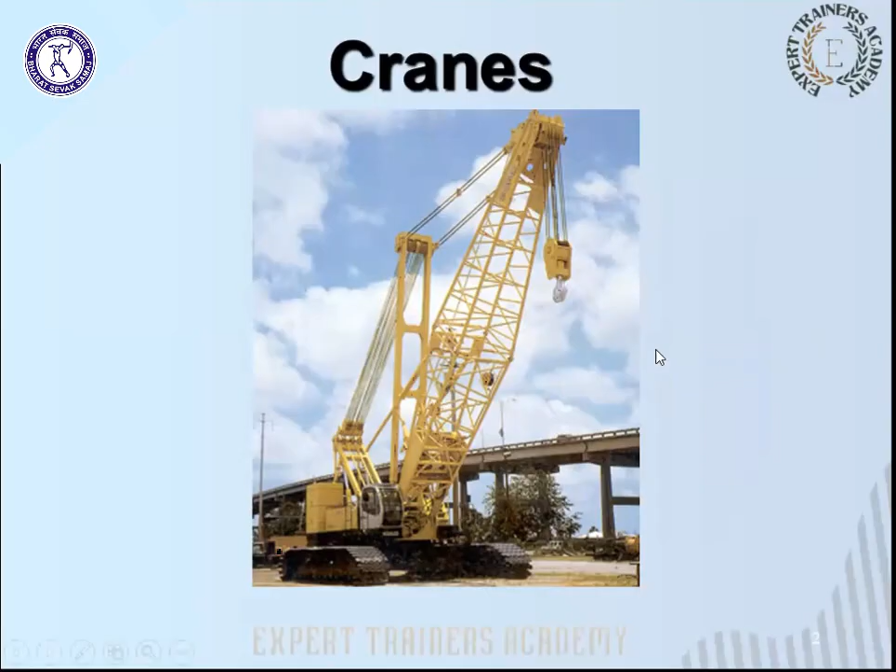To develop a safer working environment. Crane, it has come from a bird. It's a large, long-legged and long-necked bird. That's helped us to build this equipment to lift objects within a certain radius. So this topic is about crane.

What are the causes or hazards involved in crane operation? It might get in touch with overhead power line cables. It might topple over, in other words overturn, due to exceeding the safe working load, or SWL as they call it, and fall of material and mechanical failures.

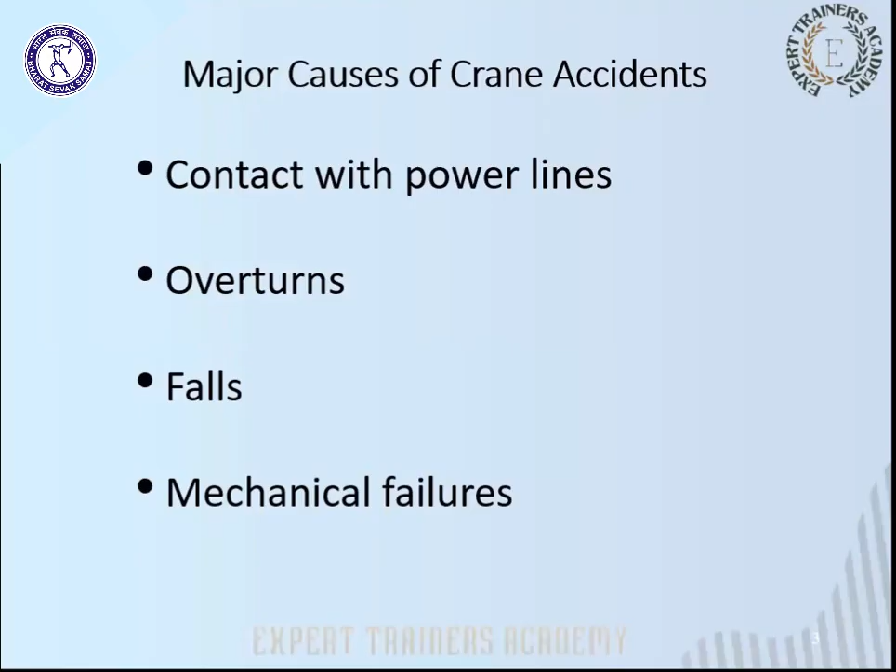So how do accidents occur? Instability of the crane. How does the instability come from? Perhaps the load is not secured, the load capacity has been exceeded, or the ground level is not even or too soft. There might be lack of communication between the operator and the signal man or the banksman, lack of training, and inadequate maintenance or inspection of the crane. So these are the reasons crane accidents could occur.

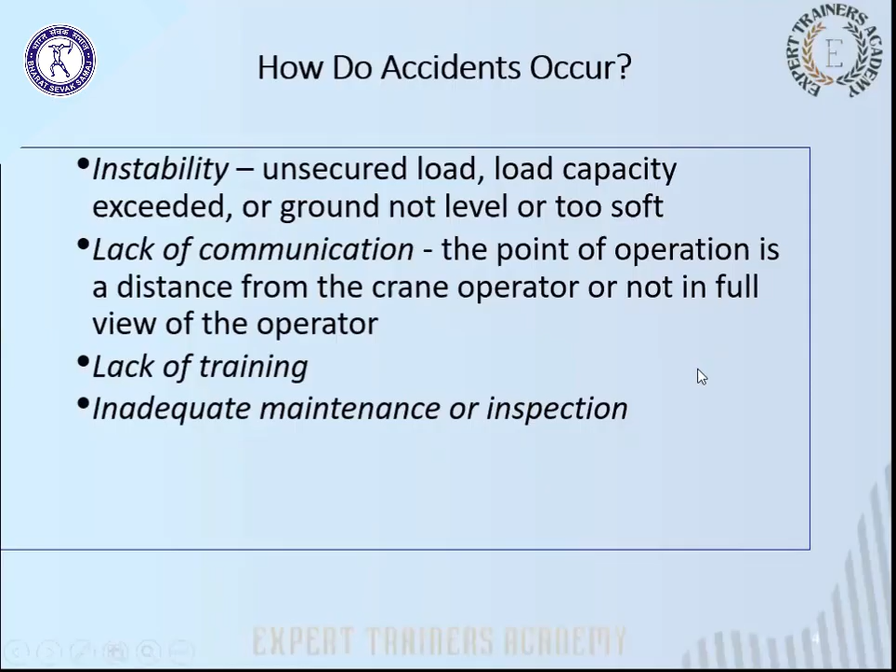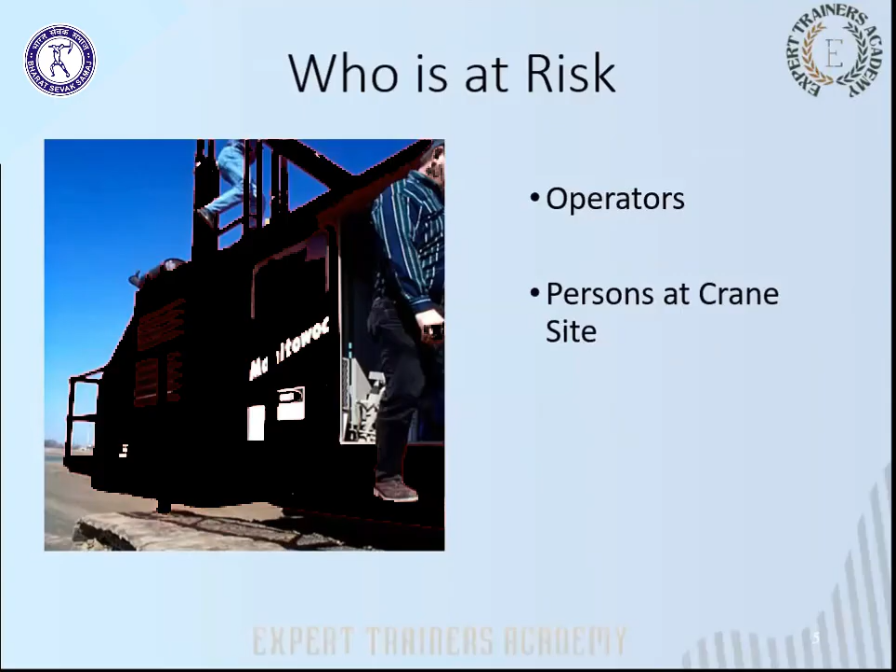Moving on to the next slide. Who are at risk? The crane operator is at risk, or the person at the crane site. Whoever is within the radius of the crane site might be at risk of the crane accident.

Definitions: Crane, it consists of a rotating structure for lifting and lowering horizontally on rubber tires or crawler treads. Hoist, used to lift and lower the load. Boom, an inclined spar or strut or other long member supporting the hoisting tackle. Boom stops, a device used to limit the angle of the boom at its highest position.

Brake, to slow or stop the motion by friction or power. The block, sheaves or grooved pulleys in a frame with hook, eye, and strap. Jib, the extension attached to the boom point to provide added boom length for lifting specified loads. These are the different components of the crane we talked about.

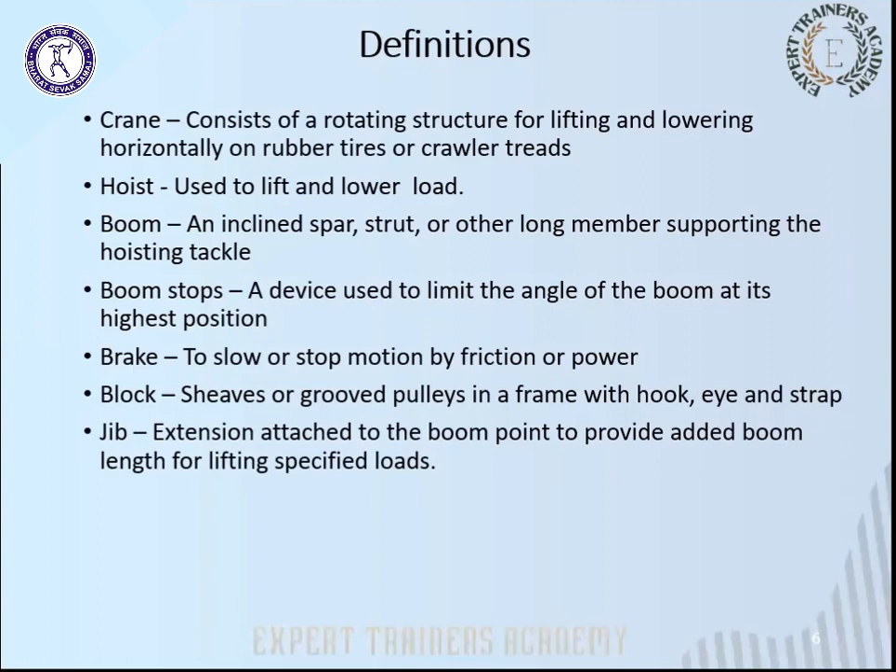What are the types of crane that we're using? Mobile crane, hydraulic crane, overhead crane, gantry crane, tower crane, predominantly.

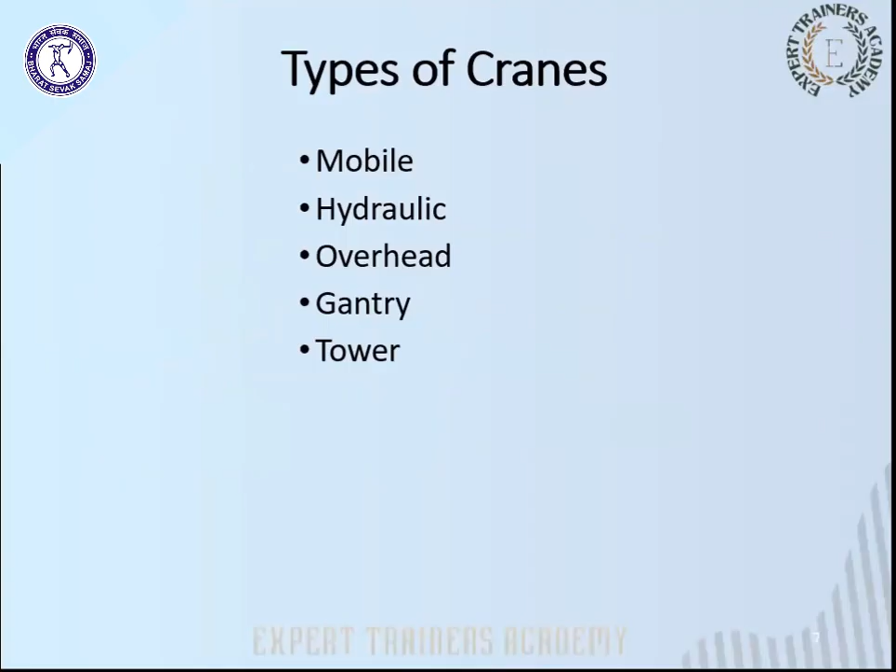What are the crane hazards? Improper load rating, operating at excessive speed, no hand signal being used while operating the crane, inadequate inspection and maintenance of the crane, or maintenance and inspection carried out by an incompetent person, unguarded parts, unguarded swing radius, or working too close to the power line, improper exhaust system, shattered windows of the operator, no steps or guardrail walkways, no boom angle indicator, and not using the outrigger or not extending the outrigger correctly.

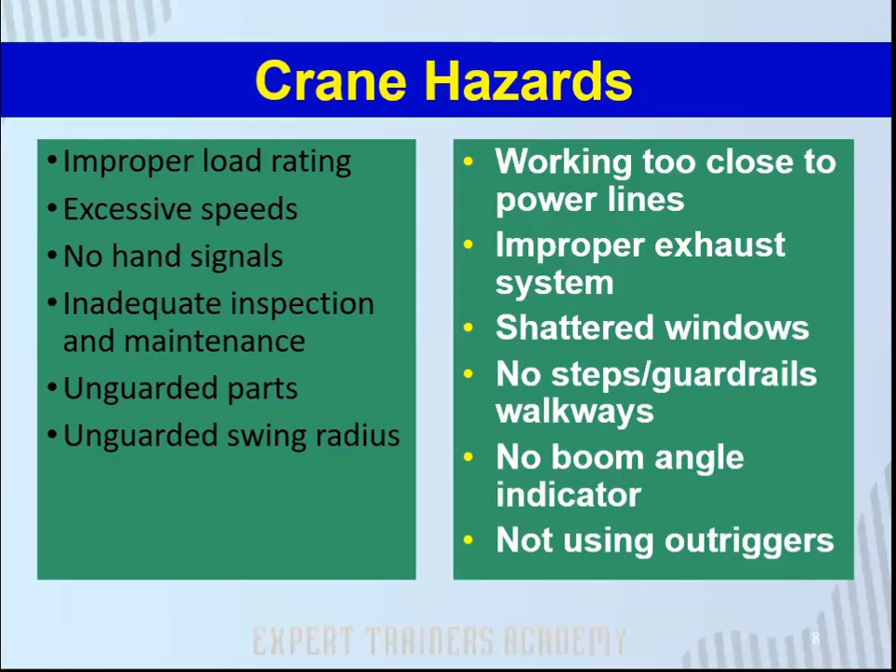So these are the different crane hazards which might arise when operating the crane. Plan before lifting, or plan before startup of using the crane. Level the crane and ensure the support surface is firm and able to support the load. Contact the electrical supply power line owners and determine precautions.

Know the location and voltage of overhead power lines. Know the basic crane capacities, what are the limitations of the crane, and what are the job site restrictions, such as the location of power lines, unstable soil, uneven ground, and also using an anemometer to check the wind speed for high winds.

Make other personnel aware of hoisting activities. Barricade areas within the swing radius. So whichever way the boom extends and swings, that radius area has to be barricaded, and entry to that area must be prevented using caution signage. Barricading is nothing but cordoning off or isolating that area.

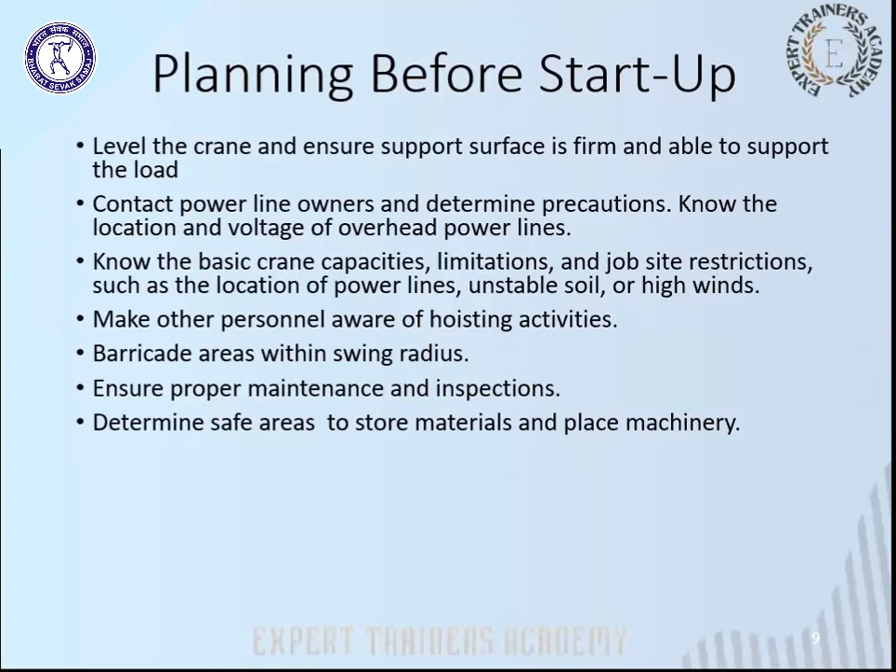Ensure proper maintenance and inspection. Determine safe areas to store material and place machinery. So you must determine the safe area to store the material and place the machinery whenever you're using a crane for lifting operations.

Competent person - competent. Immediately, what must pop up in our mind? Knowledge - a person who possesses adequate knowledge, adequate ability, has received enough training, and has enough experience to carry out any work in a professional manner and get the desired output. You can call that person a competent person.

Let me say that again. A person who possesses adequate knowledge, adequate ability, has received adequate training, and has enough experience to carry out any work in a professional manner and get the desired output - you can call that person a competent person.

He must inspect all the machinery and equipment prior to each use and during use to make sure it is in safe, operable, or operating condition. If it needs fixing, take it out of service and don't use it until it is fixed. For example, on the right hand side we see there's a broken track, so it must be taken out of service.

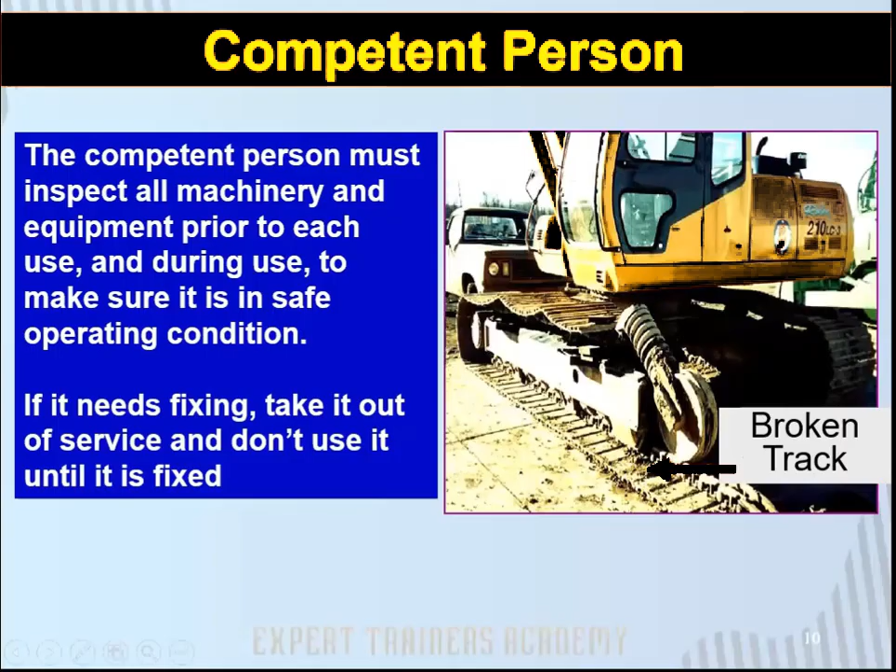Load capacity, speed, warnings. Make sure the crane operator can see the rated load capacities and operating speed, and any special hazard warning or instruction.

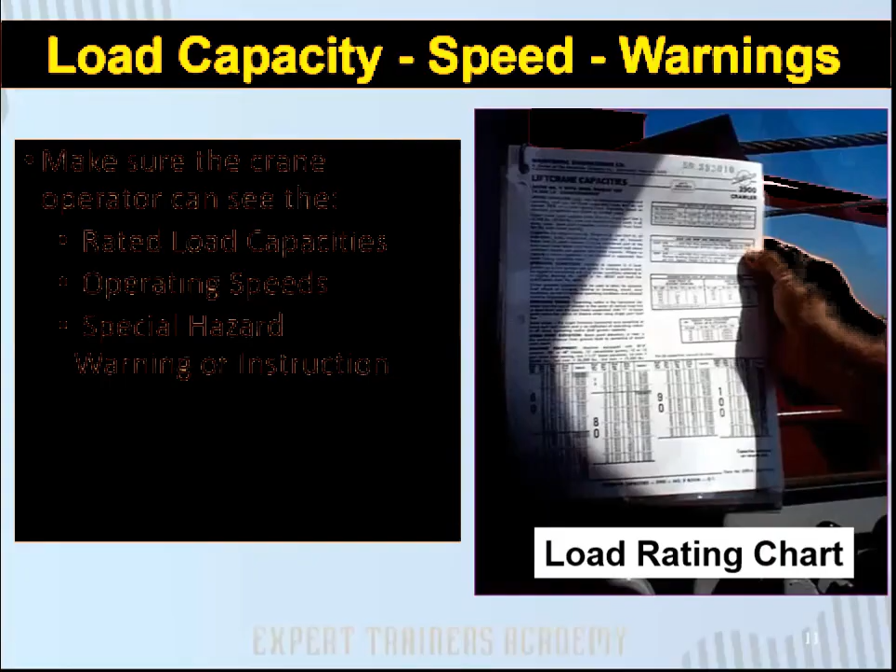Know the weight of the load. Refer to the shipping ticket or other documentation, and ensure lift calculations are correct. Ensure the load is within the load chart rating for the boom length and load radius of the crane.

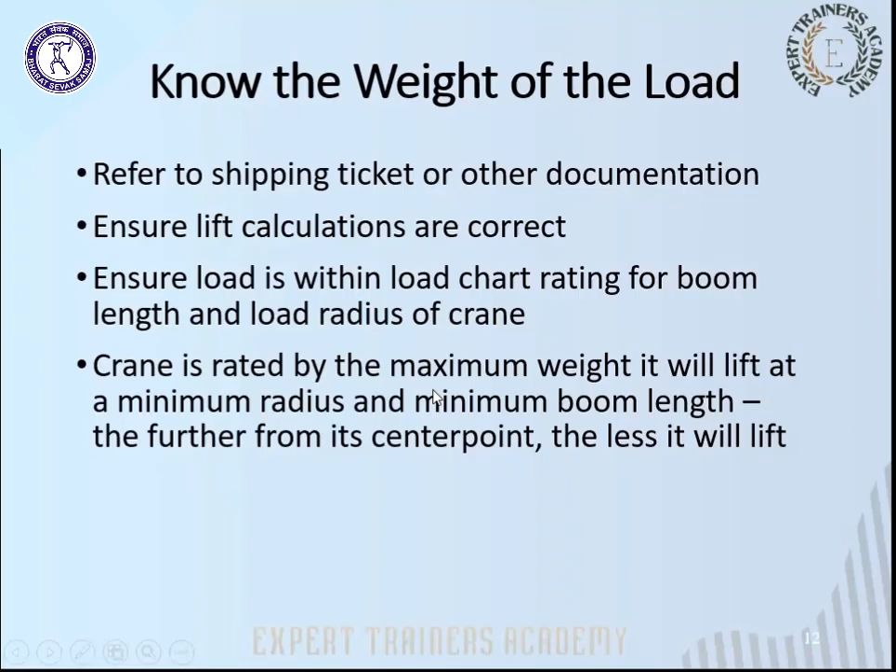The crane is rated by the maximum weight it will lift at a minimum radius and minimum boom length. The further from its center point, the less it will lift.

What are the factors we need to consider? Load limiting factors include whether the load is level, wind, and side loads. These loading factors could lead to a hazard or cause the load to fall off, including side loads on its wheels, lifting over the side, use of extensions, jibs and other attachments too far, and limits of wire rope, slings and lifting devices.

These are the factors that need to be considered whenever we're lifting the load: whether the load is even, the wind condition, the side load on its wheels, lifting over the side, and use of extensions, etc.

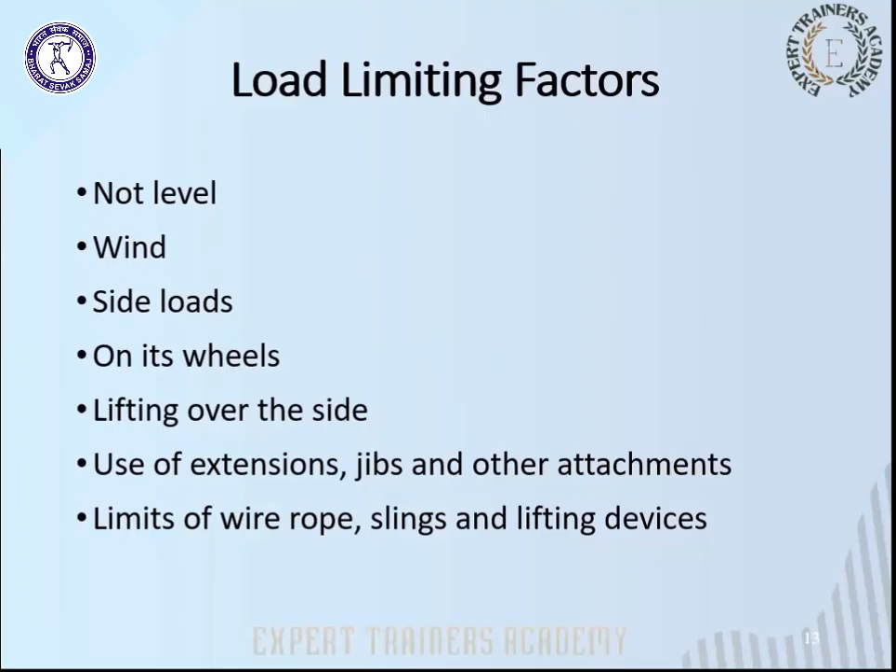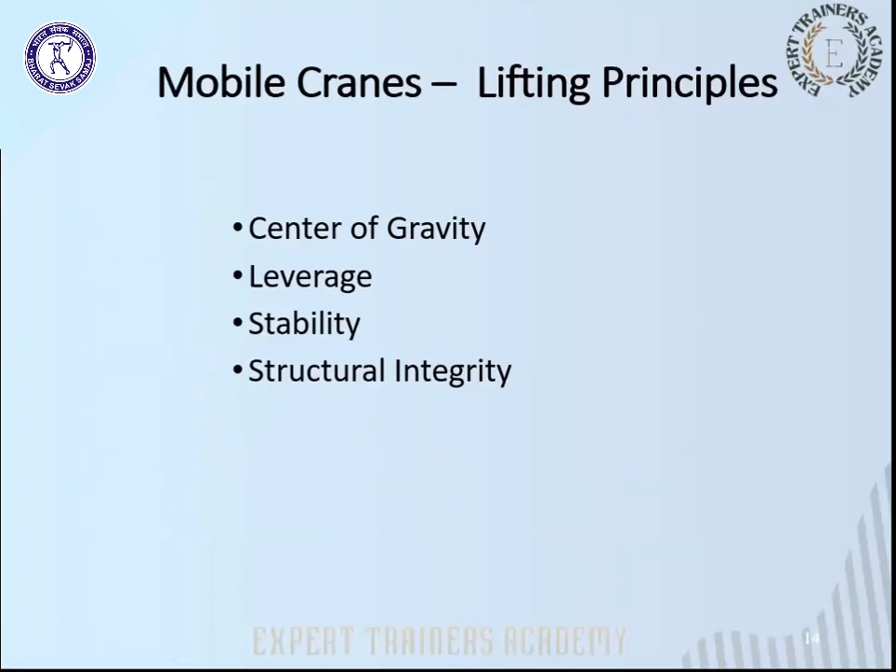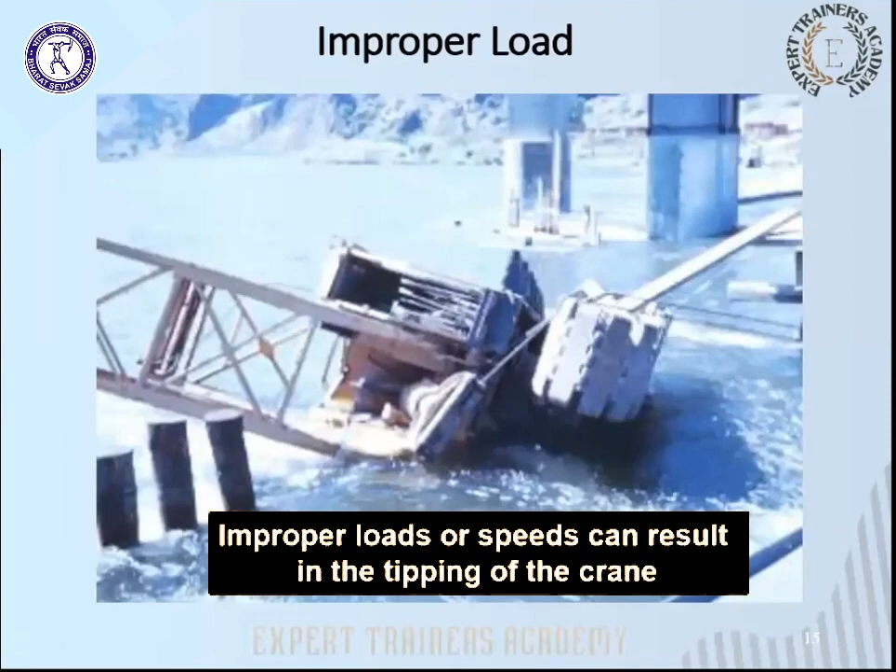Moving on to the next slide. Mobile crane lifting principles: center of gravity must be noted. Leverage, stability, and structural integrity must also be considered. Improper load or speed can result in tipping of the crane or toppling over. Improper load again can lead to toppling over or collapse of the crane.

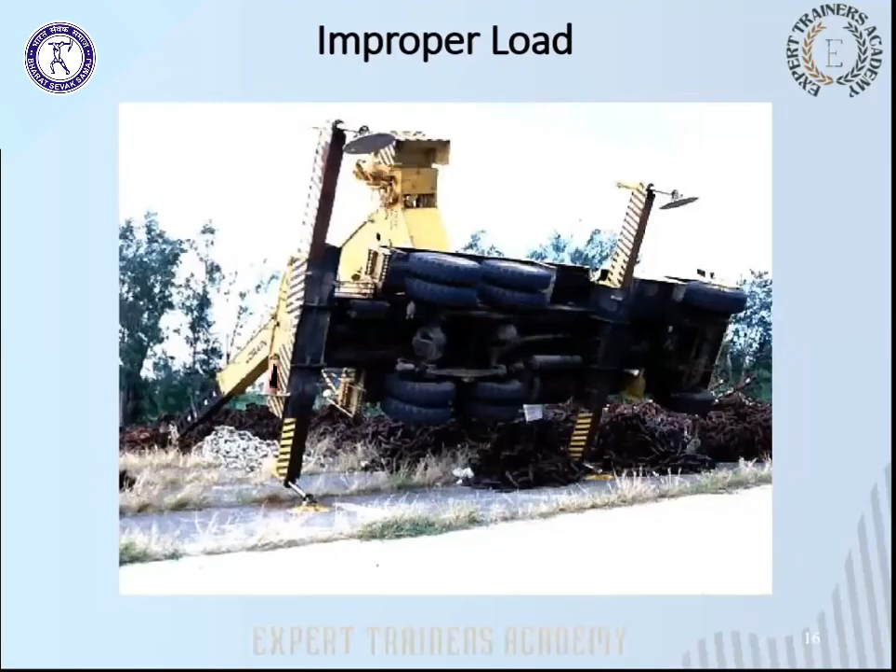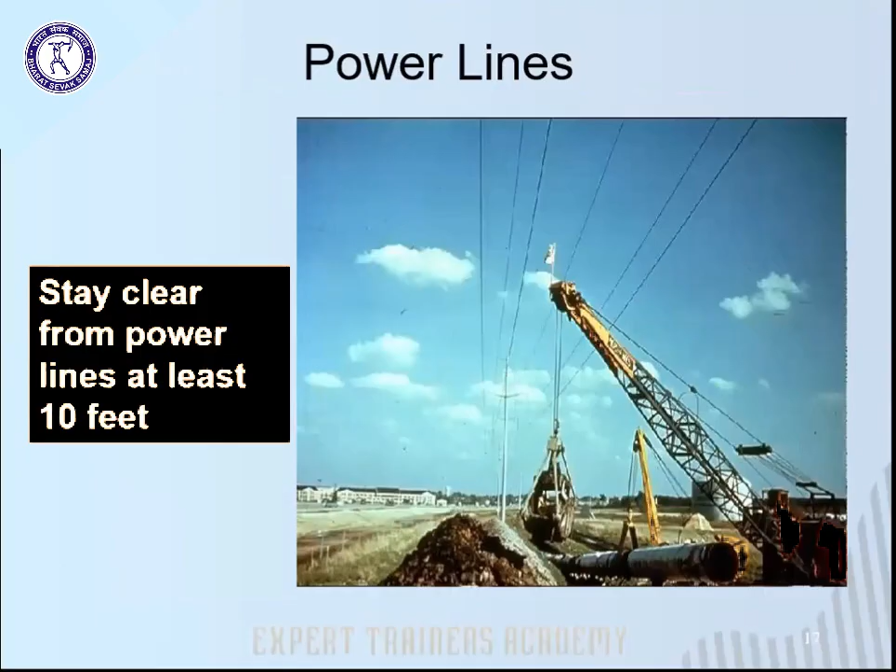Contact with the power line cable, stay clear from overhead power line cables at least 10 feet. The operator must follow the hand signal of the signalman or banksman.

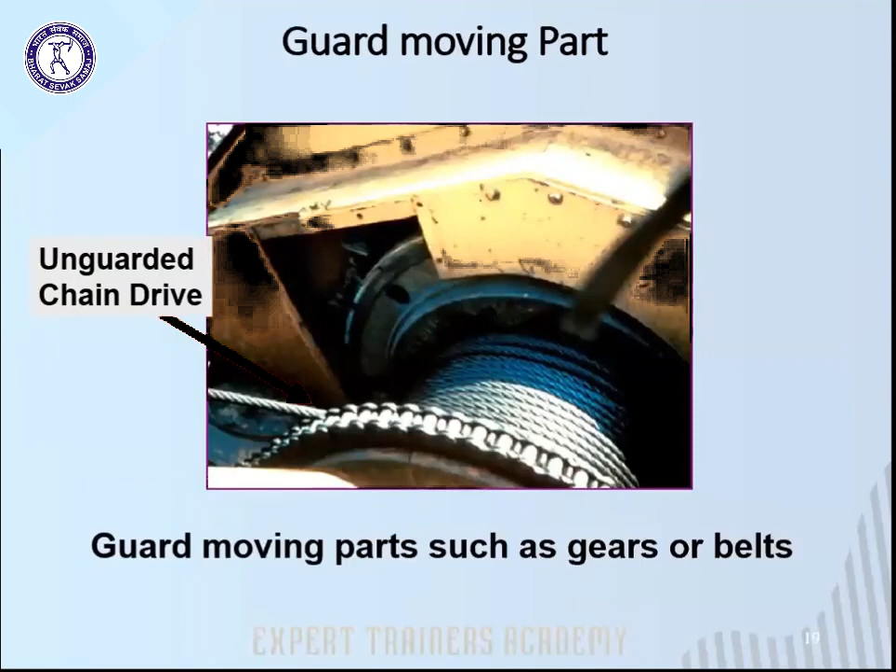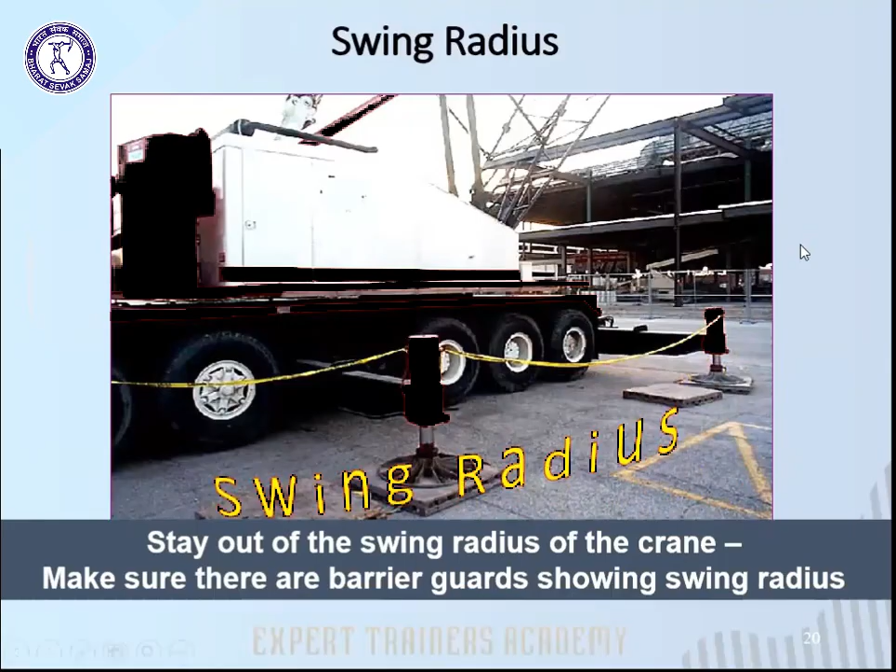The moving part must be guarded. Stay out of the swing radius of the crane. That area must be barricaded generally.

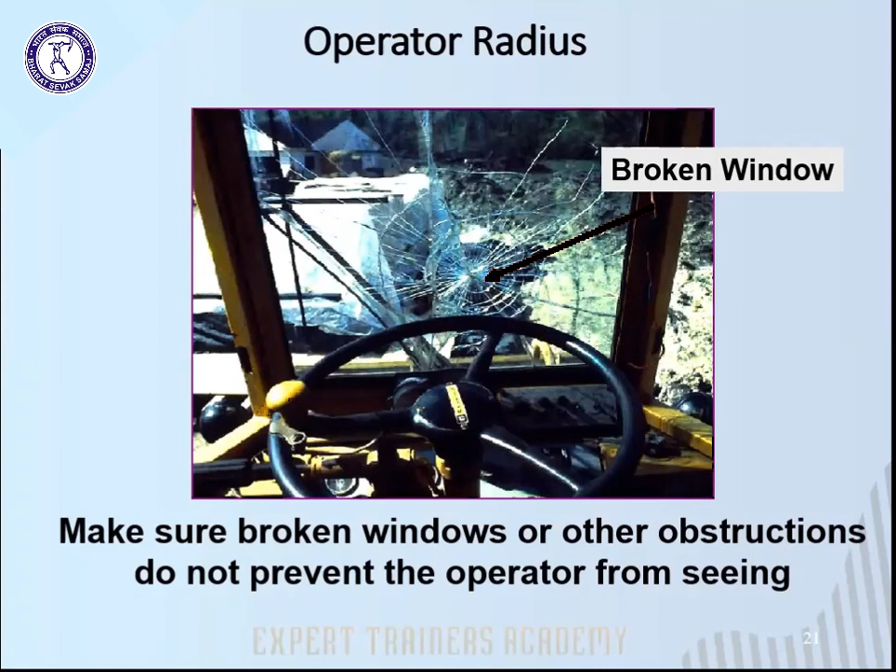Broken windows. Make sure broken windows or other obstructions do not prevent the operator from seeing. It must be serviced or repaired.

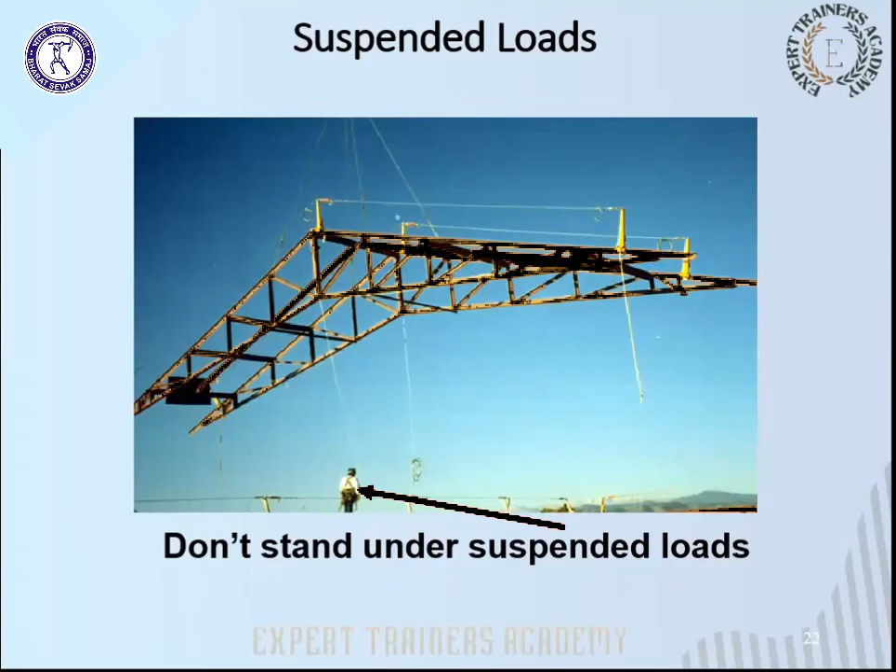Suspended loads: do not stand under the load. No personnel must be standing under the load or in the crane operation areas.

A boom angle indicator must be on the crane at all times. Supporting surface.

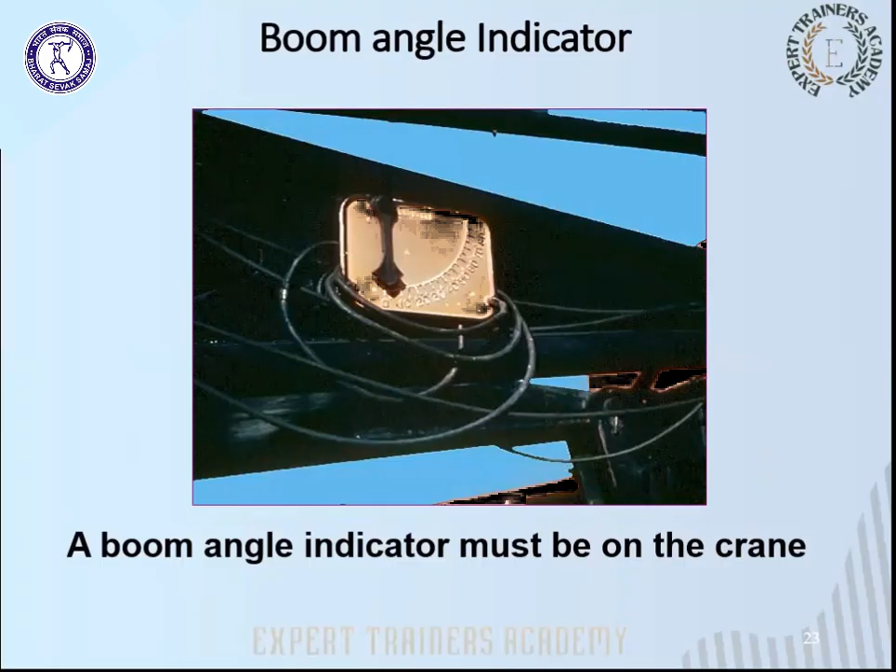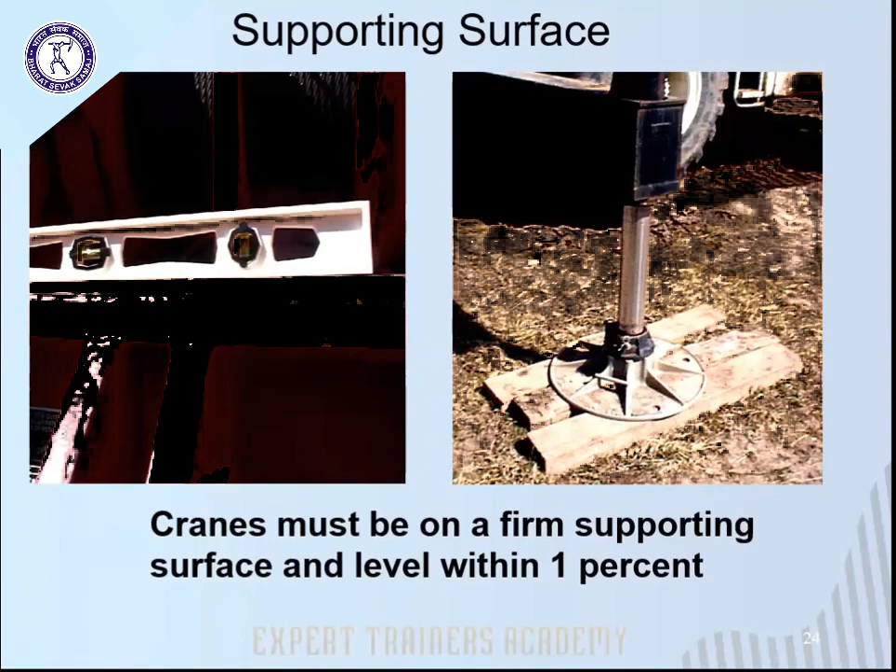Sheaves: the grooves must be smooth and free from any surface defect, which can lead to rope damage. If the grooves have any defects, it could lead to rope damage.

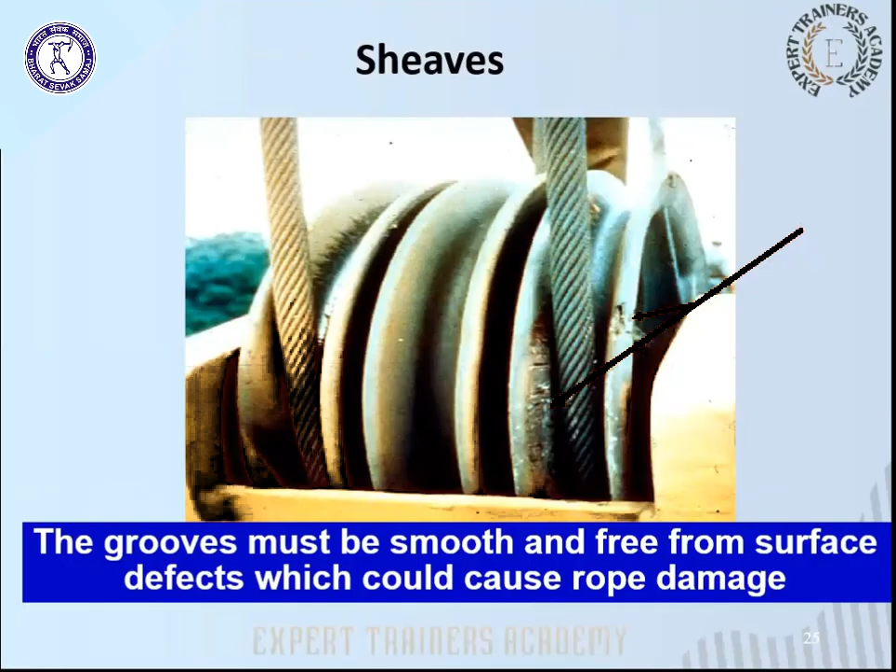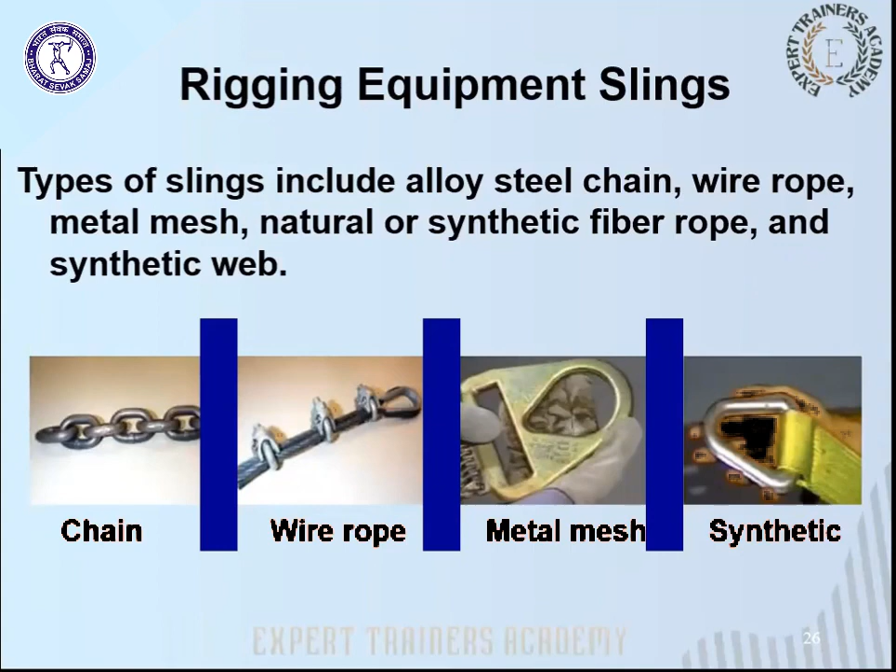Rigging equipment, slings. There are different types of slings available: steel chain, wire rope, metal mesh, natural or synthetic fiber rope, and synthetic web. Make sure it is intact and free from any defects.

Annual inspection: inspection of any hoisting machinery must be made by a competent person, and the employer must maintain a record of this inspection. There was a case where the crane was not inspected and it tipped over.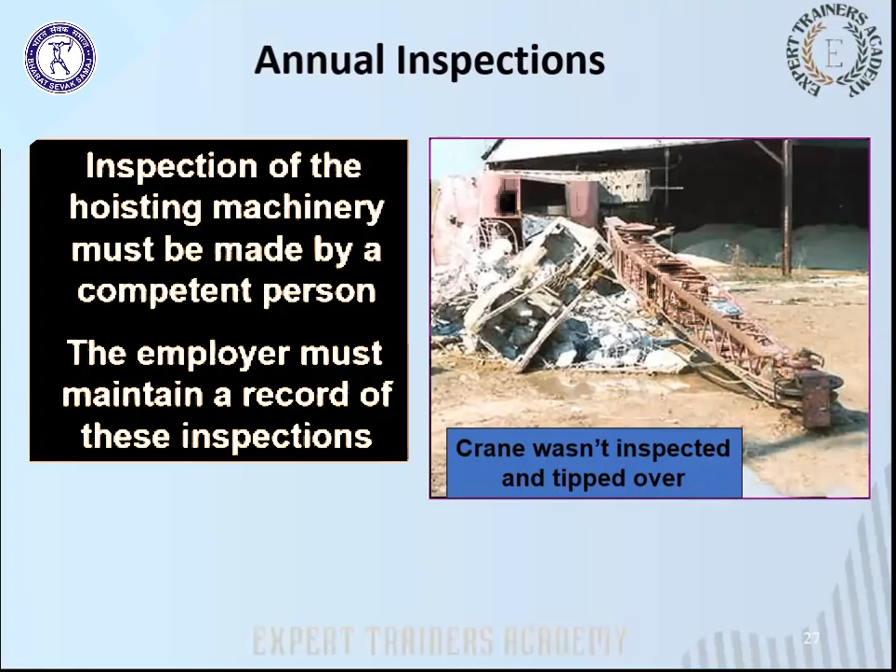So what to inspect during the crane inspection? The air pressure, ensure there is no leakage. Tires must be properly inflated, not worn, and not smooth. Check clearance for any tail swing, and wire rope for wear and tear.

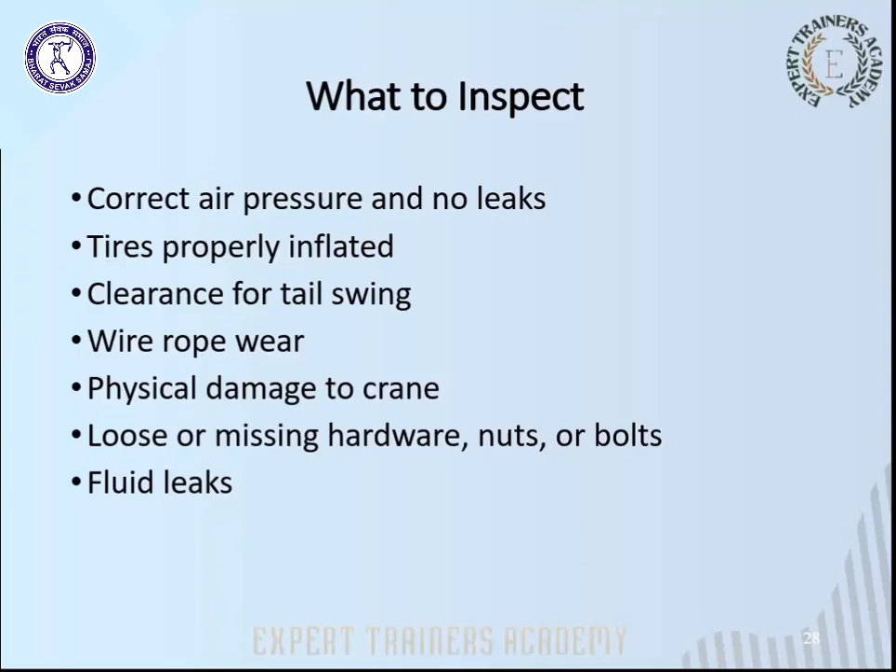Physical damage to the crane, loose or missing hardware such as nuts or bolts, and fluid leakage. These are the things that the inspector must check during the inspection.

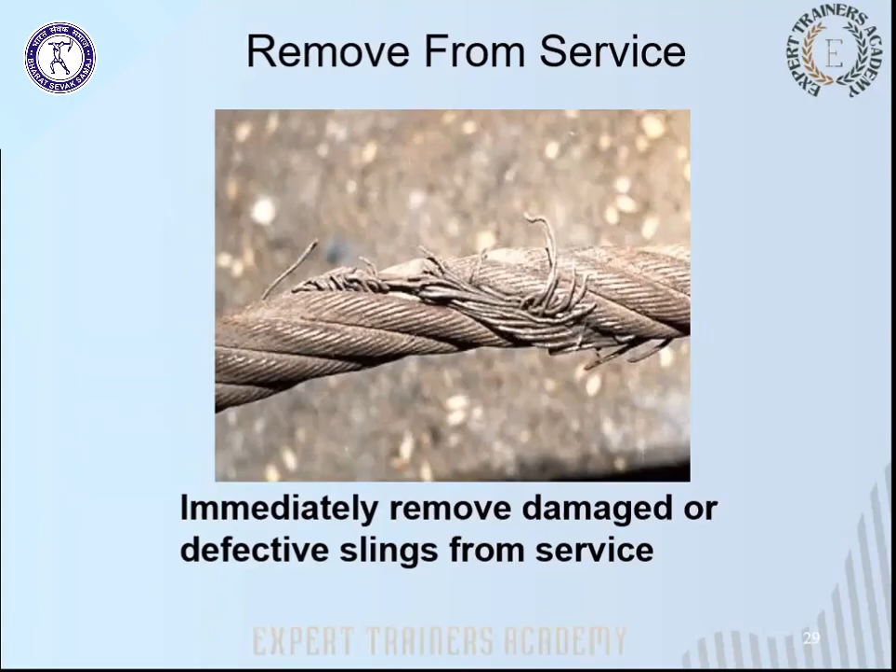Remove from service: if you see any damaged or defective sling, it must be removed from service. Damaged wire rope or crushed rope must also be taken out of service.

Worn parts - be smart, we must not use a worn part.

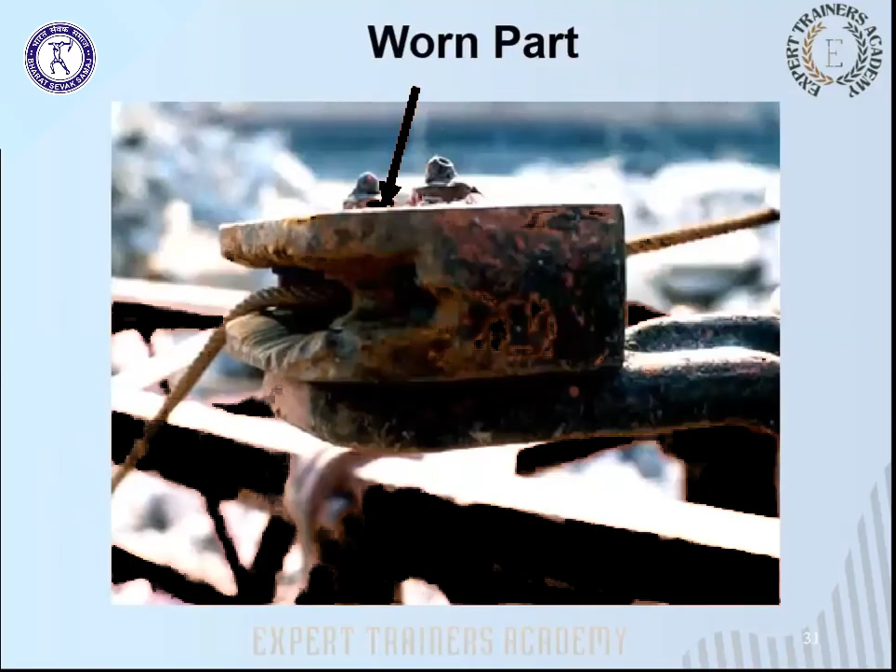Tire inspection: conduct regular inspection of tires for excessive wear or damage. Training must be provided to the operator and signalman. The operator must qualify on the specific crane he is operating, receive on-the-job training, be supervised, and be a competent person.

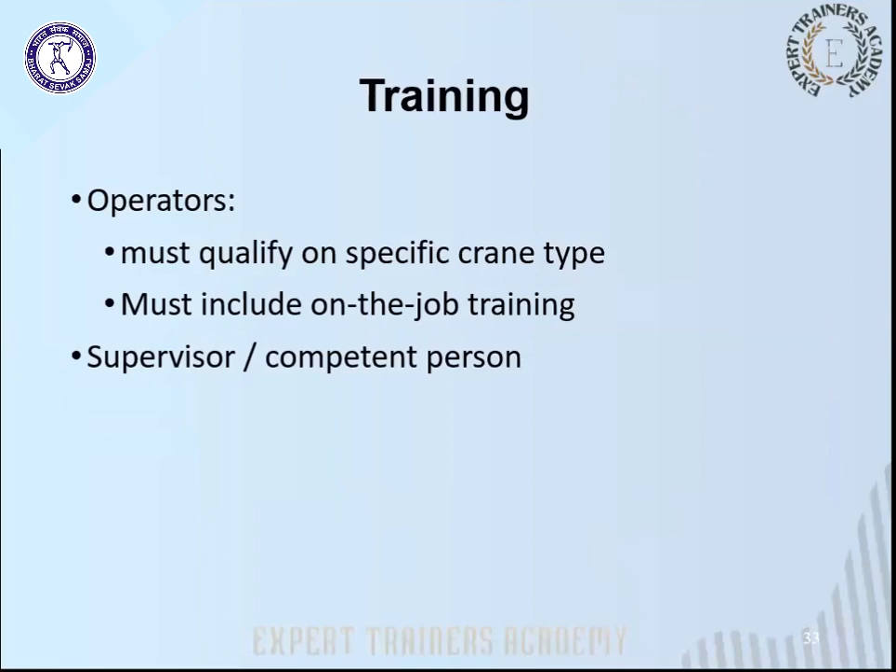Summary of this session: an unstable load, lack of communication, lack of training, and inadequate maintenance or inspection are major contributors to crane accidents happening in the workplace.

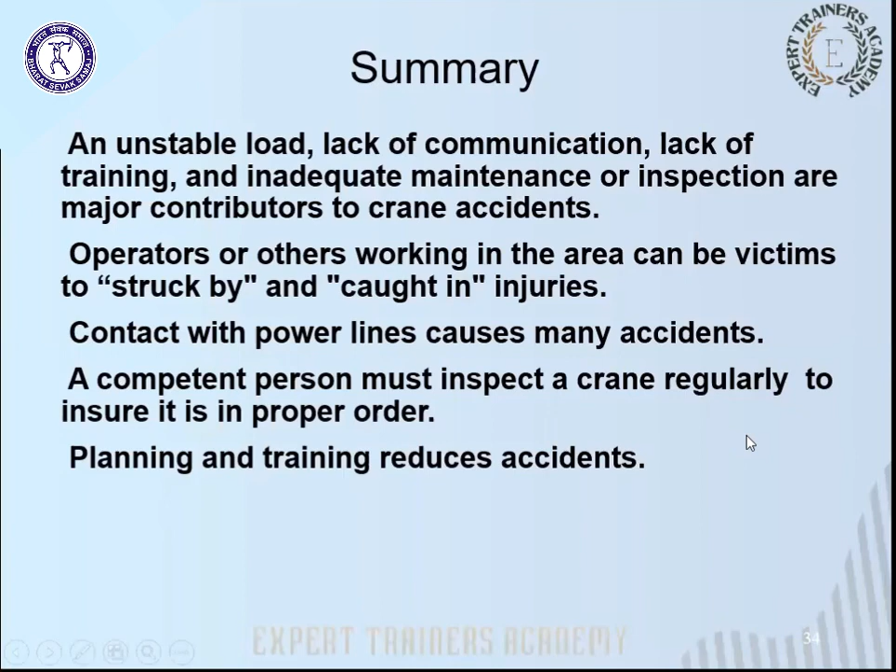Operators or others working in the area can become victims of struck-by and caught-in injuries. The crane may come into contact with power lines, which may cause accidents. A competent person must inspect a crane regularly to ensure it is in safe working condition. Planning and training will reduce crane accidents.